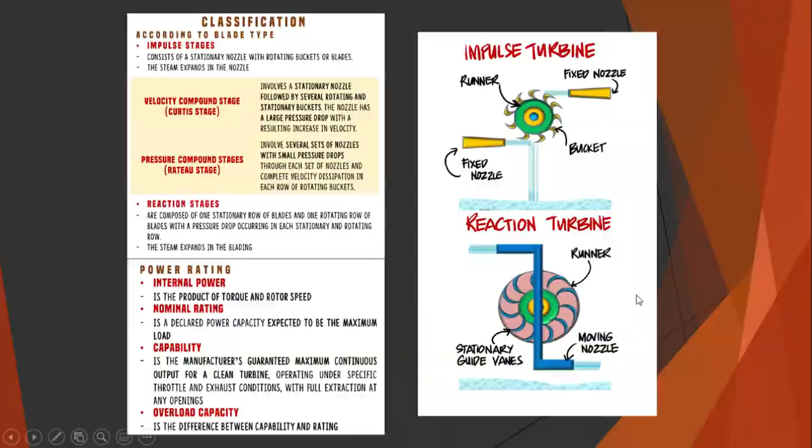Overload capacity is the difference between capability and rating. So, next. So, computation naman. So, tama ba? Computation sa ideal and actual turbine work. So,

Turbine work equals mass of steam times H sub 1 minus H sub 2. Tapos, turbine work equals mass of steam times H sub 1 minus H sub 2A. The turbine work equals turbine work stage efficiency.

Turbine power output equals mass of steam times H sub 1 minus H sub 2 times N sub T. N sub T equals NST times N sub M, mechanical efficiency. Generator efficiency naman ay equals to generator output over turbine output. Ang generator output equals mass of steam times H sub 1 minus H sub 2 times N sub T times N sub E.

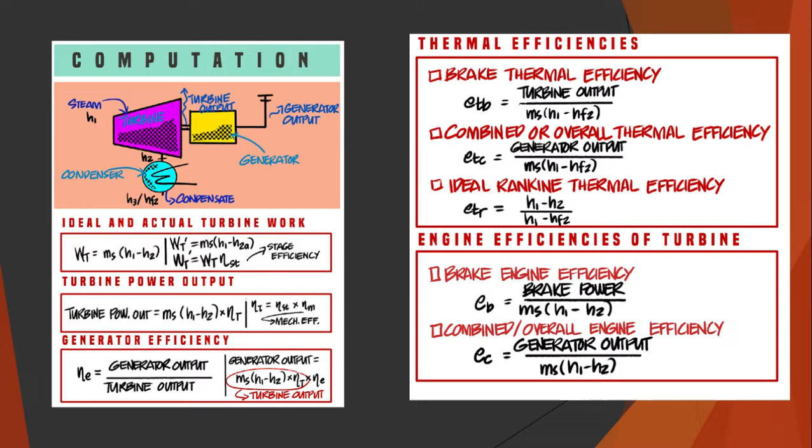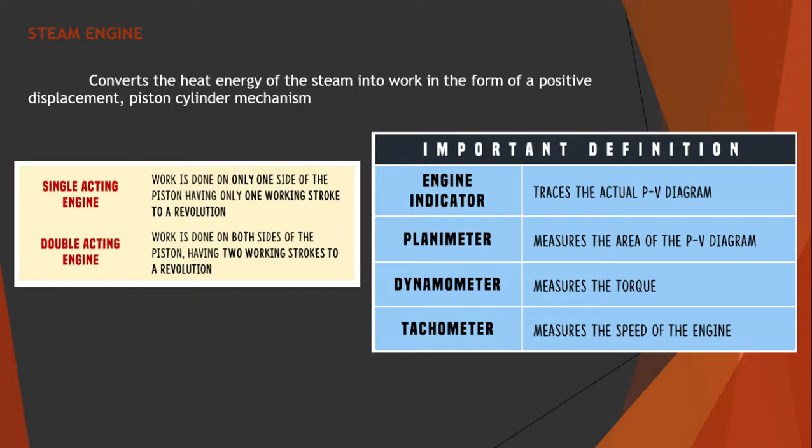So, important definitions: engine indicator traces the actual PV diagram. Planimeter measures the area of the PV diagram. Dynamometer measures the torque. Tachometer measures the speed of the engine. Next po mga master. So, computation tayo.

So, sa volume displacement, piston rod neglected. So, V sub D equals open bracket, open parenthesis, pi over 4 d square L n. Pag yung piston rod considered is pi over 4 d square L n plus pi over 4 times d squared minus d square L n.

Indicated power: pag kukuha naman yung indicated power is MEP times VD, volume displacement. So, brake power, kukuha ng brake power, MEP times volume displacement equals 2 pi T n. Sa friction power naman, power indicated minus brake power. So, mechanical efficiency, brake power over indicated power.

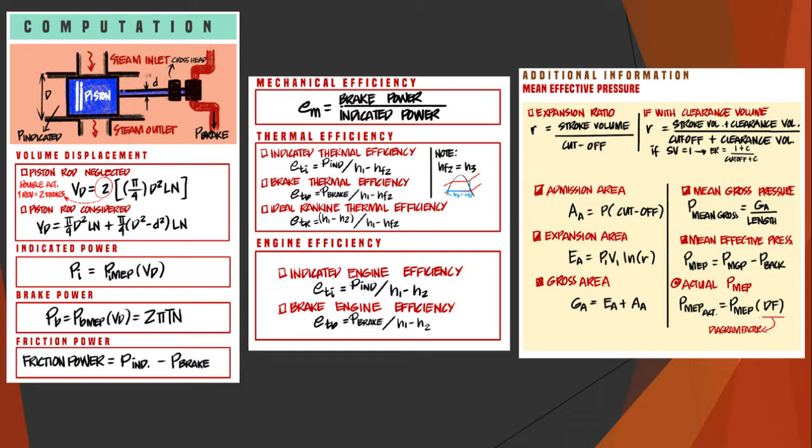So, sa condenser, a heat exchanger where steam enters at the top and the condensate is collected in the hot well at the bottom while cooling water flows through the tubes. So, ito daw po ay isang type of heat exchanger na ginagamit natin sa mga steam engine or sa iba pa. So, the function of steam condenser: convert steam to liquid before entering the steam generating unit, and create a vacuum at turbine exhaust, thereby increasing the turbine power.

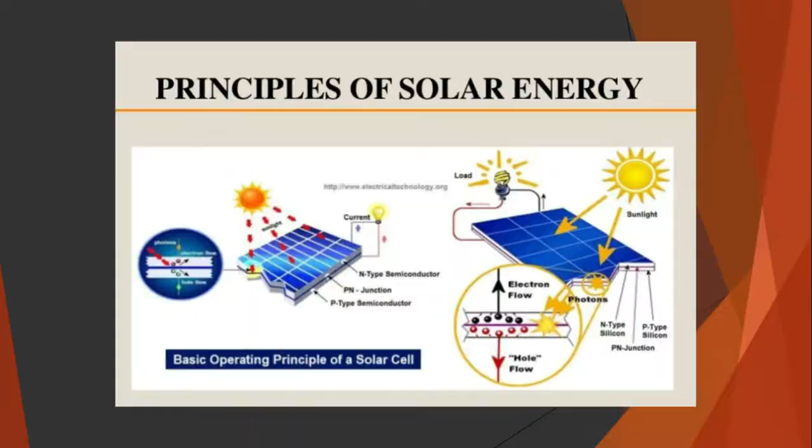So to make it simple, katulad ng sinabi ko kanina, para mapadali, when sunlight strikes the solar cell, electrons are knocked out loose from the molecule. They move toward the treated front surface. An electron imbalance is created between both surfaces of the solar cell. When the two surfaces are joined by a connector like a wire, a current of electricity occurs between the negative and positive side.

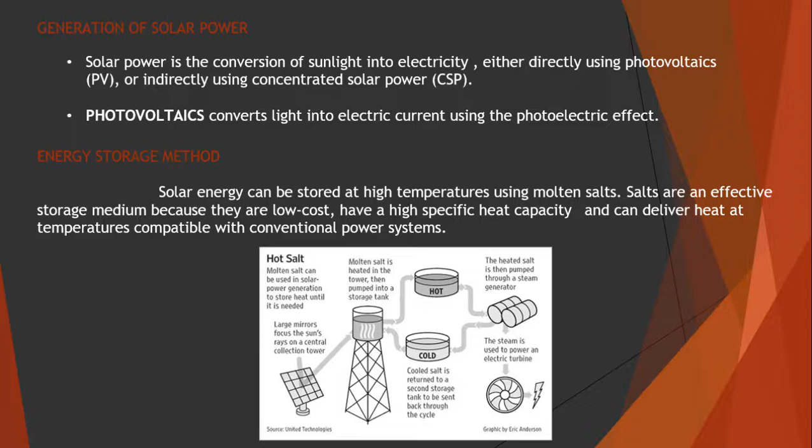So, solar cell. A solar cell is also called a photovoltaic cell or photoelectric cell. It is a solid state device that converts the energy of sunlight directly into electricity by the photovoltaic effect. Assemblies of cells are used to make solar modules, also known as solar panels. The energy generated from these solar modules is referred to as solar power. It's an example of solar energy.

Also, a panel is an assembly of photovoltaic cells mounted in a framework for installation. Solar panels use sunlight as a source of energy to generate current electricity. Cells are described as photovoltaic cells when the light source is not necessarily sunlight. These are used for detecting light or other electromagnetic radiation near the visible range, for example, infrared detectors or measurement of light energy.

Another note is that 12 photovoltaic cells are enough to charge a cell phone, and it takes many modules to power an entire house. That is just a quick note.

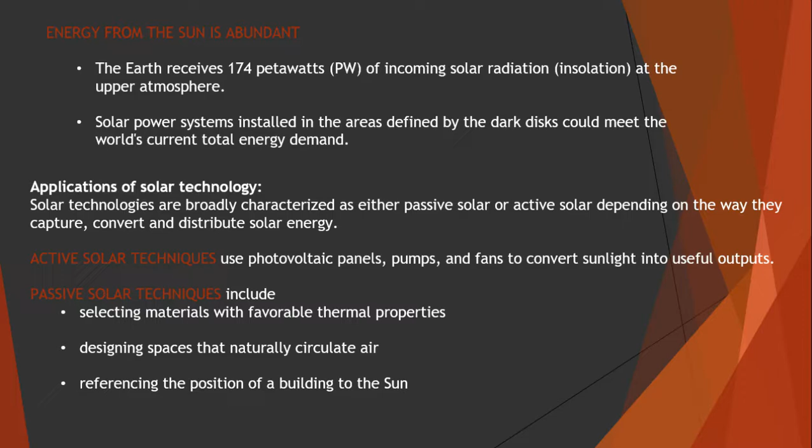Yeah. So here we are at the pros and cons of solar energy. The main pros of solar panels are that they give off no pollution. Solar energy produces electricity very quietly. Unlike power plants, coal power plants or wind turbines, for example, which are very noisy and can disturb other people. So it's nice because of its lack of noise, I'm sorry.

It has the ability to harness electricity in remote locations that are not linked to a national grid. It is very efficient in large areas of the globe. And solar panels can be installed on top of many rooftops, like many other people or households do.

It is affordable in the long run. It is noted here in the long run because first of all, it is very expensive at first, but like what I said earlier, in the long run, what I mean is the panel is worth it. So second to the last, it is affordable in... I'm sorry.

Lastly, the use of solar energy to produce electricity allows the user to become less dependent on the world's fossil fuels. Being less dependent on the world's fossil fuel supplies means that you are using less coal, which is very good for the earth. So solar energy.

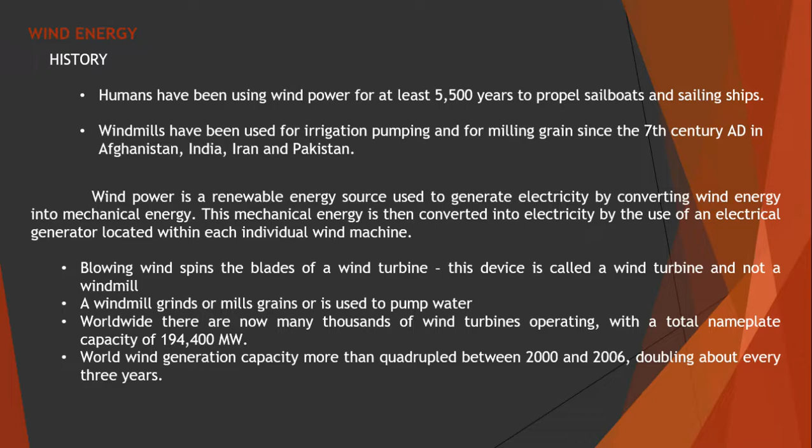For the origin of winds, the origin of winds may be traced basically to uneven heating of the Earth's surface by the sun. This may lead to circulation of widespread winds on a global basis, producing planetary winds, or may have a limited influence in a smaller area to cause local winds. So global or planetary winds: two major forces determine the speed and direction of wind on a global basis.

First is the primary force due to the differential heating of the Earth at the equatorial and polar regions, which is heat transfer. And the spinning of the Earth about its axis produces a Coriolis force, which is responsible for the deviation of air currents. It deflects the direction of the winds. Yeah.

So number two is local winds. They blow over short distances. Localized and uneven heating is responsible for local winds. Local winds are produced by two mechanisms. First is differential heating of land surfaces and water bodies due to solar radiation. Second is differential heating of slopes on the hillsides and that of lowlands. Yeah, next slide, please.

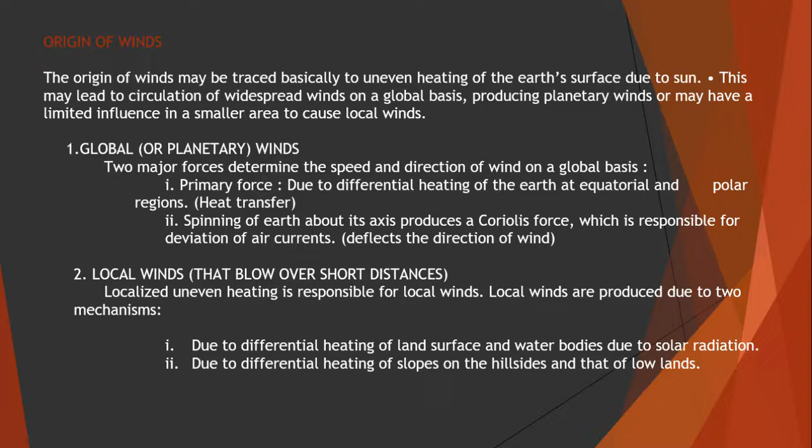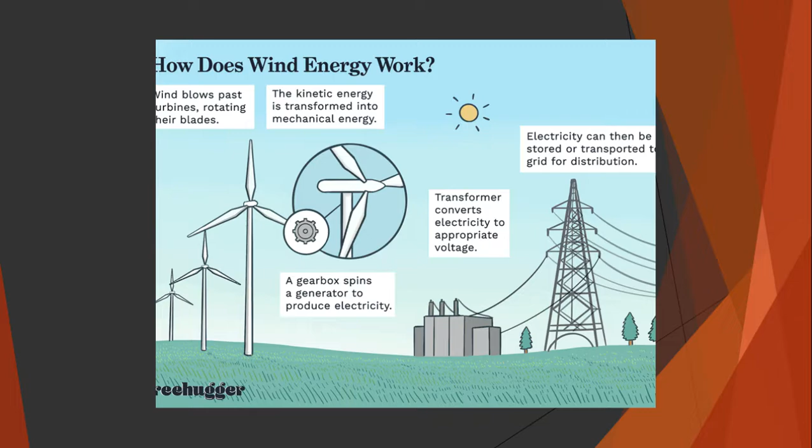Here. So how does wind energy work? Wind blows past turbines, rotating their blades. The kinetic energy is transformed into mechanical energy. A gearbox spins a generator to produce electricity. A transformer converts the electricity to the appropriate voltage, and electricity can be stored or transported to the grid for distribution. And after that, it is sent to our homes. To make it simple: the wind's kinetic energy to rotational energy to electrical energy. So next slide, please.

So here, electricity generation. The blades of the turbine are attached to a hub that is mounted on a turning shaft. The shaft goes through a gear transmission box where the turning speed is increased. The transmission box is attached to a high-speed shaft which turns a generator that makes electricity. To make it simple, makikita po natin. No, we will explain the part later. So next slide, please.

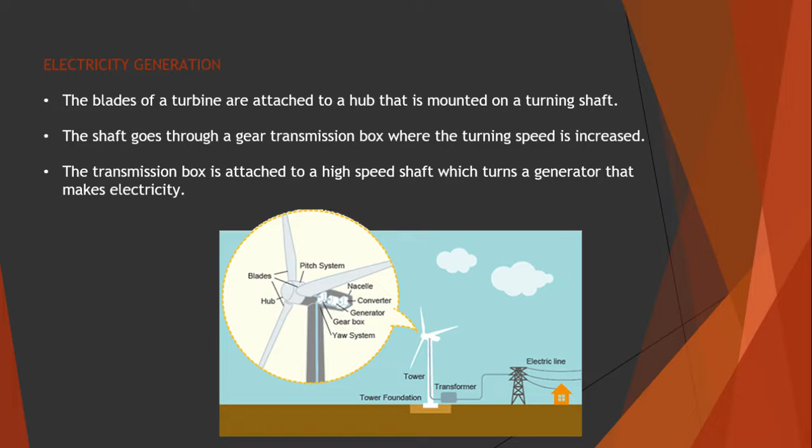So there are two types of... before we go to the HAWT and VAWT, I would like to discuss the factors of how much electricity they can produce. First is the size and orientation of the blades. Second is the blades' aerodynamic design, the bend style of the turbine or the blade. And the third is the amount of wind turning the rotor. So those are just simple factors.

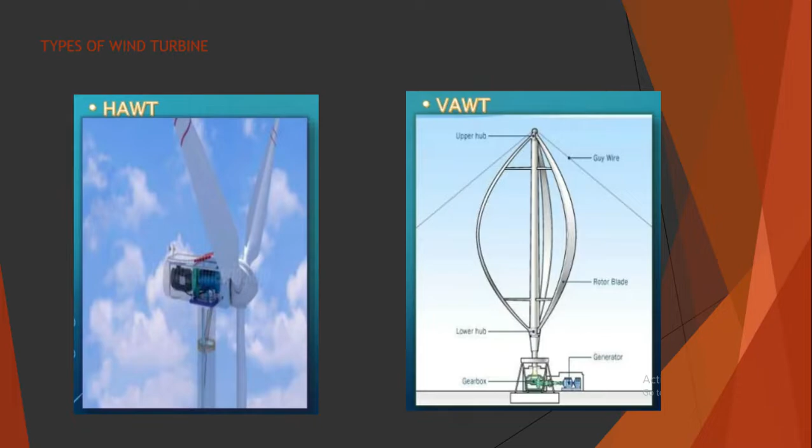So next is types of wind turbine: the HAWT and VAWT. The HAWT is the horizontal axis wind turbine. The design allows the blades to capture the wind's full force by tracking the wind's direction and turning to where the wind comes from. It is also called yawing. And the VAWT, or the vertical axis wind turbine, blades can pick up wind from any direction but with less efficiency than the horizontal axis wind turbine. So wind travels faster over the curved surface, creating a low pressure pocket above the blade that forces it upwards. And that's HAWT and VAWT. So next slide, please.

Before we go to the wind turbine components, I would like to note that a turbine can only capture 59.3% of the wind's energy, according to Albert Betz. So for the wind turbine components, first is blades. Most turbines have three blades. The turning of the blades generates electricity. Like what I said earlier, the blades' size, orientation, and design are also factors for the turbine to generate electricity by receiving the wind.

Second is hub. It's the center of the rotor to which the rotor blades are attached. Rotor blades and hub together are referred to as the rotor. And the fourth is low speed shaft. The low speed shaft is on the inside part of the turbine, turned by the rotor at about 30 to 60 rotations per minute, or RPM. Gears connect the low speed shaft to a high speed shaft and increase the rotational speed from about 30 to 60 rotations per minute to about 1000 to 1800 rotations per minute, the rotation speed required by most generators to produce electricity.

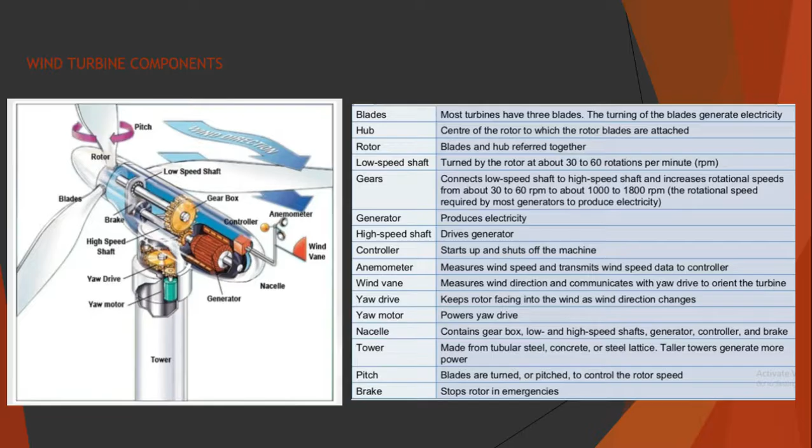So these are the pros and cons of wind energy. First is renewable energy, like solar energy. Like all forms of solar energy, wind power systems are non-polluting, so they have no adverse influence on the environment, like also in solar energy. And wind energy systems avoid fuel combustion and transport; they are cost-free renewable sources. So for the disadvantages, wind energy is fluctuating in nature and it varies from zero to storm force, which is unreliable.

Second, wind energy systems are noisy in operation, like what I said earlier. A large unit can be heard many kilometers away. So it is like other power plants that require the houses to be far away from the wind turbines. Birds and bats have been killed by flying into rotors, so animals can be affected too. Good wind sites are often located in remote locations, far from the cities where electricity is needed. Installation and maintenance cost of wind turbines is very high because it is very expensive.

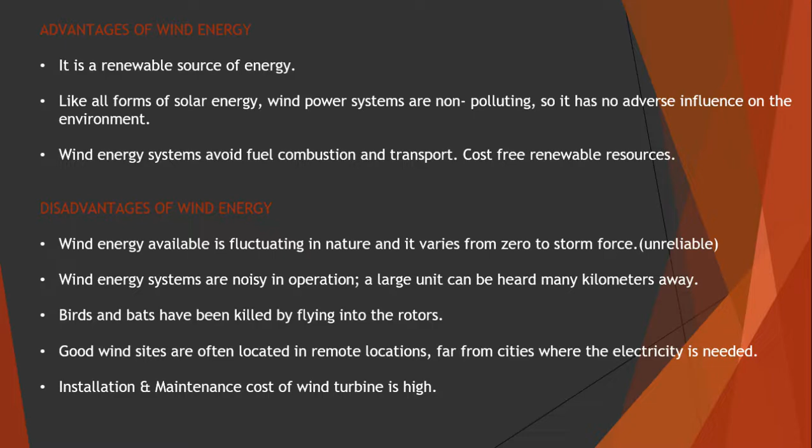So that's it for our presentation. I hope you learned some things about our topic. Thank you.